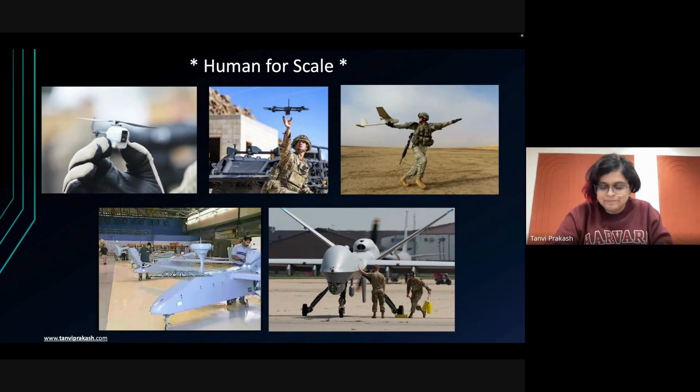This is the size - you can see the size of the humans who are working on it. It's about the same height as a human, you could say. And then you have the MALE or HALE UAV class, which are almost as big as a commercial airplane.

So UAVs can be so diverse. You look at all these different configurations and different ways of flying. Some fly with wings, some fly with rotors, some fly with both. And they take off in different ways - some take off from a runway, some take off vertically, some take off from a canister, shot into the air.

They are used for a variety of applications. Of course, surveillance is the one that's gaining a lot of public notice because of the geopolitical situation these days. But they're also used for other activities like climate monitoring. The one you see on the left is actually a high altitude UAV flying over a cyclone in the Bay of... Florida, whatever you call it now.

And then you can also have UAVs which are almost like satellites, which are solar powered.

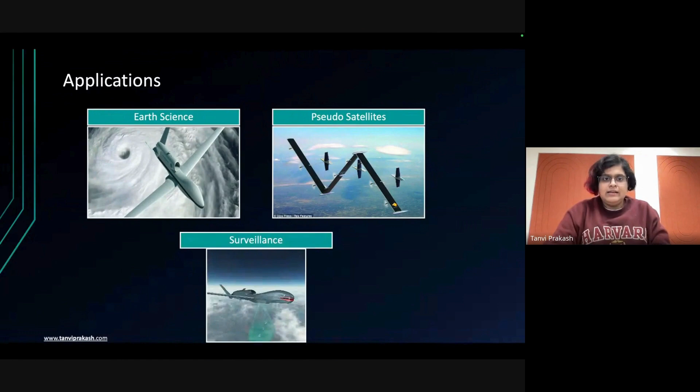So you can have solar powered UAVs which are pseudo satellites, which can provide network in remote areas, things like that. Now, how do you actually go about doing this?

Really, I don't know if it's innovation, but definitely it's looking for a loophole, looking for something you can change. And UAVs, the way they've been developing over the years, have definitely shown this kind of spirit, where you find a small loophole and it's possible to take out an entire army tank with just a UAV the size of your palm.

So the first stage is you have to think differently. Now, after this, you get serious. You start looking at what your customer really wants - you look at their requirements. This is called the specification generation or the concept of operations stage.

During this stage, what you basically do is look at it from a customer, from a user point of view, and see what they want. For example, let me break down this requirement for you.

At the bottom here, you can see there's a 2,300 foot runway available with the customer. The user wants the aircraft to take off with a crosswind component and clear a 50-foot obstacle across the runway, be able to take off in these conditions. After takeoff, climb to an altitude of 25,000 feet, then have a cruise climb, and then loiter at 15,000 feet for a period of 24 hours, then descend back and land on the same 2,300 foot runway, along with 1 hour reserve loiter at sea level.

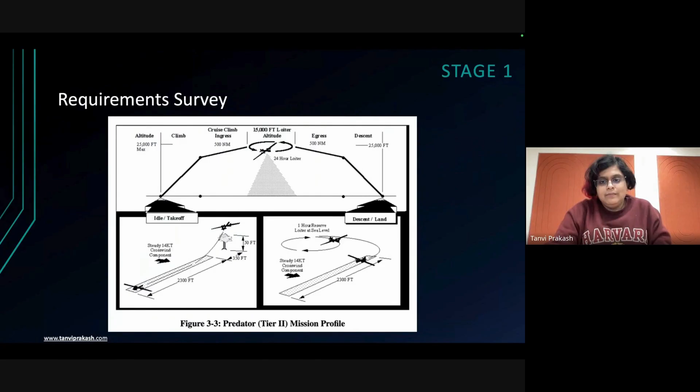Next, here is where you can start ideating on the different ways you can solve this problem for the customer. You can go for a fixed wing, you can go for a quad, start thinking whether you want 4 rotors or 6 rotors, how it needs to look, what payload it needs to carry.

On the right, you'll see there are different priorities for design. At this stage, you need to fix your priorities. For example, if your basic requirement is that this thing needs to be really low cost in manufacturing, you'll probably build it like this. If you want it super sleek and high speed, maybe it'll end up looking like this. If you want it very strong and rugged, it'll end up looking like this.

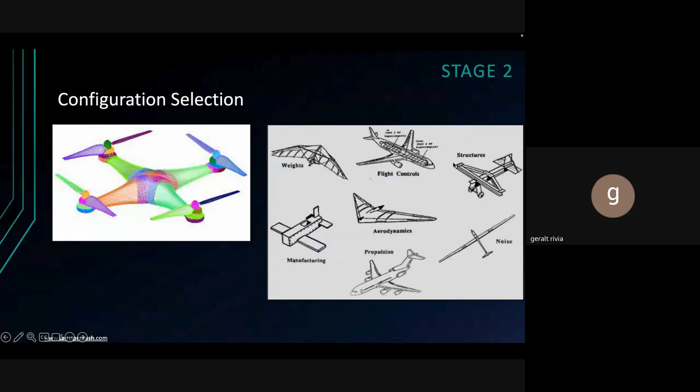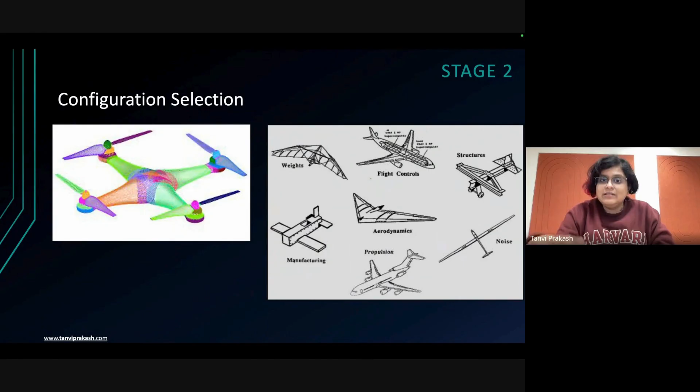So now you'll get a feel that there's a wide variety of configurations that can be selected based on your priorities. You'll start thinking, based on the concept of operations, what could be my end user's priority - are any of these their priorities? And from this, you end up choosing a particular aircraft.

Now, at this stage, this is when you start getting into performance. You start looking at lift, drag. You can start doing your flow analysis over the aircraft, trying to see whether you're generating enough thrust.

The photograph on the right shows one of the iconic aerobatic display teams of India, the Surya Kiran team. This particular aircraft is designed to fly upside down. So how do you calculate the performance of this aircraft in this configuration?

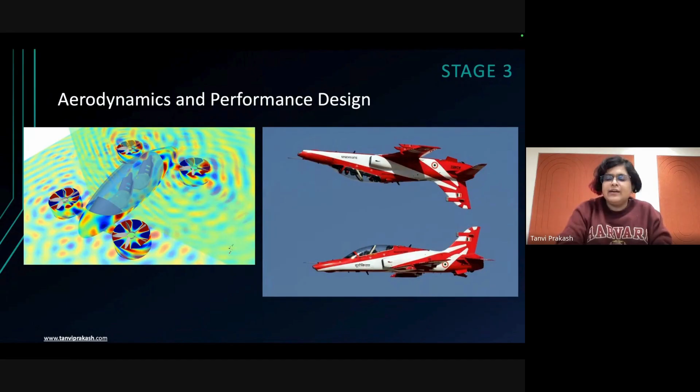This is not an AI generated image. They actually do fly like this close to each other. From the cockpit, they can see the other cockpit. So what kind of accuracy of controls is required? All of these things you start thinking of at this stage.

The stage after this is where you start deciding how you hold this aircraft together. Everything has to be rigidly held in place. There shouldn't be too much deformation, or the aircraft shouldn't break up in flight.

Many times something known as design creep comes in. So you started off with a guess value of your weight, but you end up...

Yeah, I think the screen got unshared again. Okay, let me share it again. Thanks for letting me know.

So maybe you start off with a guess value of weight, and then you end up with something heavier. Then you modify your aerodynamics again a little bit to match that weight, and then it's a cycle. Hopefully this cycle will converge for you. Sometimes it doesn't converge, in which case you throw out this design and start a new one.

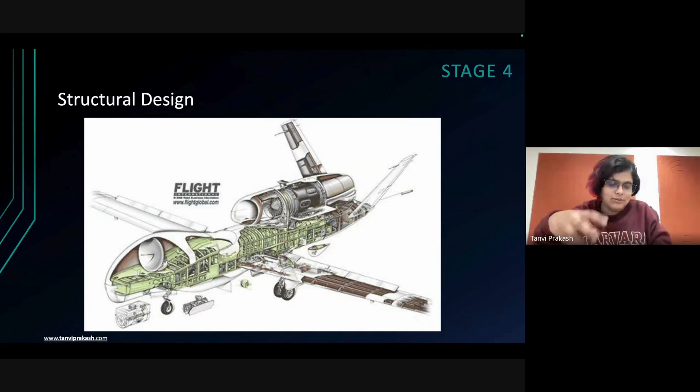At some point during this process, you also need to figure out what kind of engine you want. Is it a jet engine? Is it a battery with a drive and a propeller? Or is it an IC engine? Or is it like a turboshaft or a turboprop engine?

What is the weight of this propulsion system? What's the thrust to weight ratio? What's the power at which it operates? How much fuel does it need to operate? What energy content do you need to carry? Does it fit in that airframe which you made?

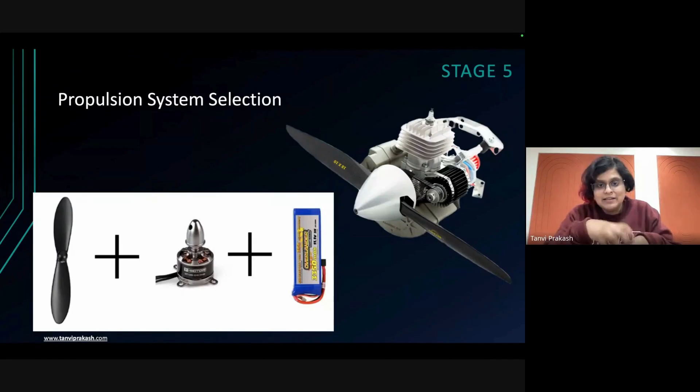So now you're getting a flavor that all of these are actually a circle. You have to figure this out, plug it in, recalculate aerodynamics, come back, see if you need more power. This is again part of that cycle.

At some point in that cycle, you also have to check your stability. The basic fundamental requirement is that you should be longitudinally statically stable, in which case you need to have your CG ahead of your aerodynamic center. Now there are ways to calculate how far this distance needs to be, how stable you want the aircraft to be.

Do you want a very stable, smooth aircraft, or do you want something that's hyper controllable and highly maneuverable? So the stability margins will decide what your design CG needs to be.

Along with this, you also need to figure out how you're going to achieve the maneuvering or the kind of stability that you want. What is the avionics configuration that goes into it? And of course, there are various architectures available for controlling and for different purposes.

You'll be hearing a lot about this, I'm sure, during the Robotics Café series. So you need to figure out how exactly you want to control the aircraft, and in order to do that, what all needs to be on board the aircraft, what all needs to be on the ground. Remember that there is no pilot in the aircraft.

So now you also have an additional responsibility of transmitting information from the ground to the air. The way these two talk to each other, you send a command, the command is acknowledged and sent back, and that's how the loop with the pilot or with ground control is established. This loop also needs to be designed in a way that it meets the customer's expectations.

For example, if you had the cyclone monitoring kind of application, what is required is that you need to send back pressure and image data to the base, maybe at NASA, and they crunch the numbers and say, okay, now position the aircraft 20 kilometers to the east and collect data again. So this kind of data telemetry is required in real time, and then you need to calculate how much bandwidth you need to provide to transmit that data. This is the point in the design where you need to freeze all this, because everything comes at a weight, and weight is a premium on the aircraft, like you saw in the design loop process.

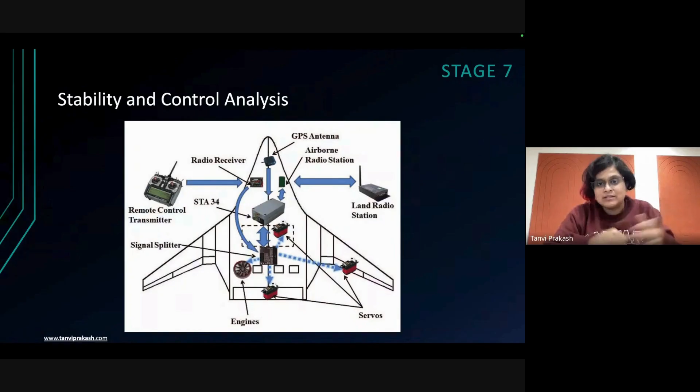Once you are sure that all this works, now you go into manufacturing. Unfortunately, there are a lot of differences between design and manufacturing. Let's say you decide the weight of this aircraft is so-and-so, and it has these 5 avionics components that sit inside. But what about the weight of the wires that were supposed to be harnessed inside the aircraft? Did you factor them in at the early design stages, or did you discover in manufacturing that now you are suddenly X kilograms heavier? So now it's your awareness of how the manufacturing data is going to be fed back into your design to optimize how close you can match your ground estimates with what you are actually manufacturing.

So during the manufacturing process, you also start thinking of things like how expensive this aircraft is to manufacture. Just the materials of the aircraft may cost you.

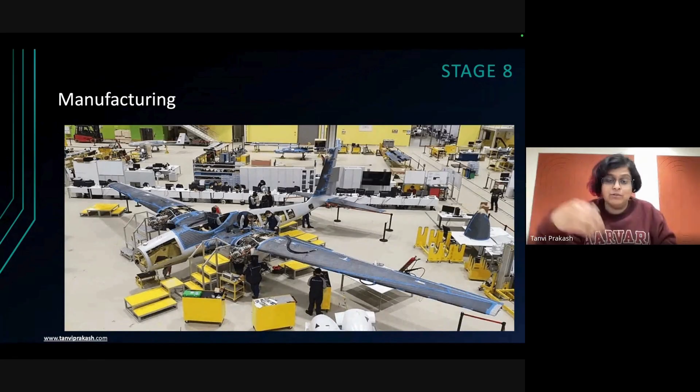And then you have a prediction of how many aircraft you're going to sell in the future. Let's say you have 5 customers and each of them is going to purchase 20 aircraft from you. You're going to sell 100, then your profit margin could be something. If you manage to sell 1,000, your profit margin could be something else. So this math and this finance also happens around this time in the manufacturing stage itself. Prototypes are typically much more expensive to manufacture because the cost of R&D is higher, but once you're in serial production, typically it's observed that the price of manufacturing comes down.

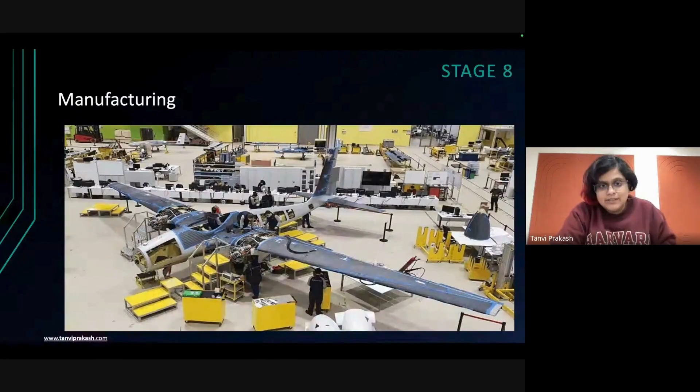Now, of course, before you even get into that stage where you're printing out 5 aircraft per month or 500 aircraft per month, before that, you need to be sure that the aircraft is doing what you expect it to do. And this is the most exciting stage of the process, frankly.

You make the aircraft pretend that it's flying by giving certain sensor inputs to the aircraft. You give it altitude, you give roll, pitch, yaw angles, you give drag. You give some of these numbers to the aircraft and see how the aircraft responds in this simulated flight. Actually, the control surfaces will move, the engine will be fired, the aircraft will try to tilt, the landing gear may be deployed. All these things need to be tested on the ground before you ever get into the air.

Mainly, why you need to do this is, see, if you're building a ground system or you're building a car, let's say, if the car breaks down, you can just pull over on the side of the road and fix it and then start going again. But in the aircraft, there's no such option. If something breaks down in the air, you're going to crash and you'll lose the plane, and perhaps, you don't know what you'll fall on the ground.

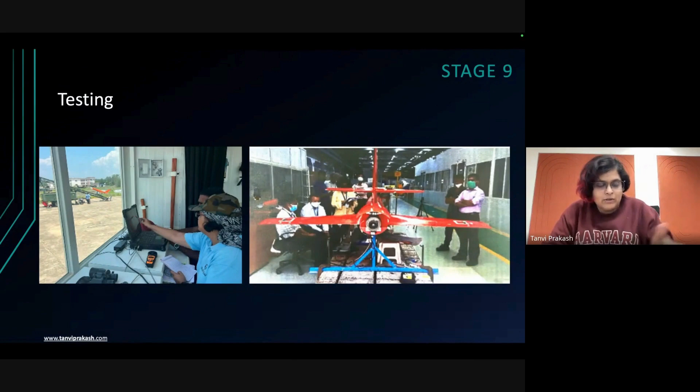So of course, your control loops, your software, your logic, and your interlocks, all of this is tested at this stage on the ground first to ensure that everything works. And then you take to the air. And when you take to the air, you also fly in very controlled environments where, God forbid, if something goes wrong, you should be able to recover your aircraft safely and without loss of life to your team or to anyone else around. On the left is a photograph of my co-pilot and me at one of our test ranges where we were flight testing the Tir UAV.

So this process, frankly, is a process of validation. And this process is actually the most time-consuming and also the most expensive part of the UAV development process.

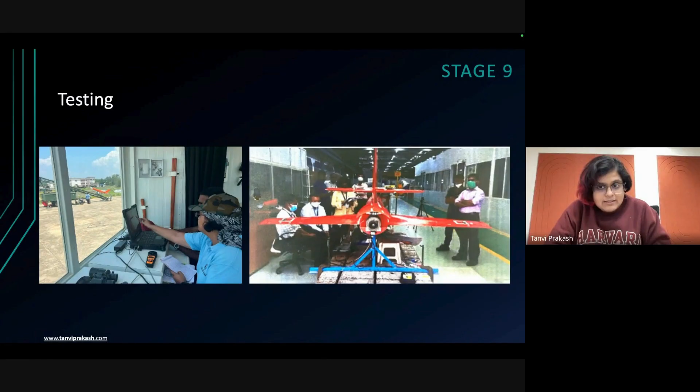And not just that, now it's also a matter of how much availability is there of the aircraft. Let's say you have a fleet of 20, but the aircraft is so difficult to maintain that at a given point of time, only 10 are operational. Then it's not giving value for money to your customer. But at the same time, you also want the aircraft to be safe and functioning well. So now it's a trade-off.

So when you look at the final product of a UAV, actually, your users, your customer is most interested in this aspect. It's like us buying a car. We ask two questions when we buy a car. Kitna deti hai? What's the mileage? Does it perform well? And what's the maintenance cost? These are the primary concerns. Everybody asks various other questions: How does it look? Is it big? Does it fit everyone? All these things. But at the end of the day, you're worried about how much you're going to be spending to maintain that car. So this is something like that.